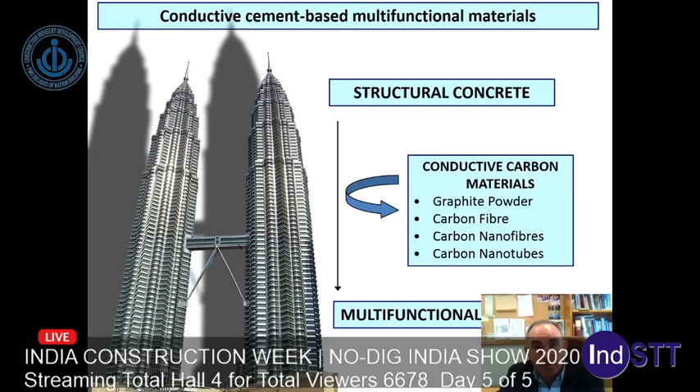It is widely known that the main function of concrete is its structural function. On the other hand, concrete is a bad conductor of electricity, it's a dielectric. However, the addition of a conductive carbonaceous material such as graphite powder, carbon fibers, carbon nanofibers, carbon nanotubes, transforms the resulting mixture into a conductive material. This gives the possibility of using this new material for other functions different from the structural one, so it can be considered a multifunctional material. Possible applications include sensing function, heating and de-icing function, and electrochemical application.

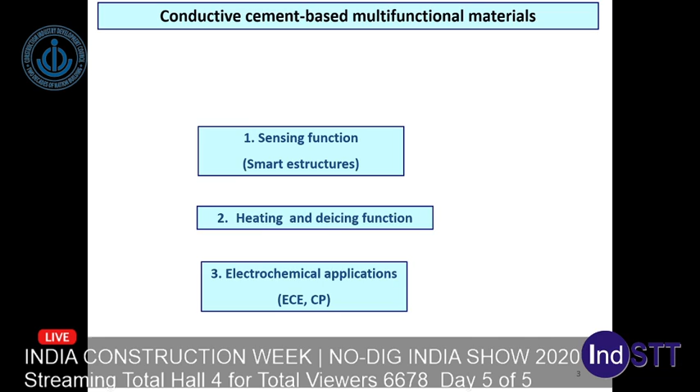Let me comment on the first function, that is the sensing function, or the ability of a structural material for detecting its own deformation when subjected to some external static or vibrating load. This means that we are in the presence of a very promising and interesting material if we want to plan an intelligent structure. Specific applications include structural vibration control, traffic monitoring, building safety, AC optimization, and structural service monitoring.

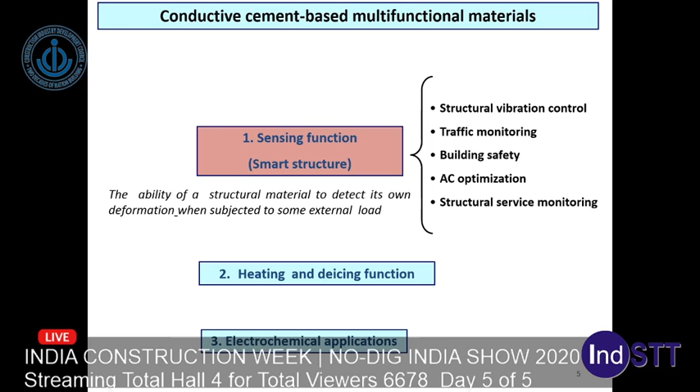Sensing function is based on the change in electrical resistance in concrete when some stress is applied to it, and it is quantified by the gauge factor, that is the ratio of fractional change in resistance divided by the fractional change in deformation. Due to the change in dimension, length of sections not being significant, the change in resistance must be due to the resistivity change in this material, which is a material intrinsic property.

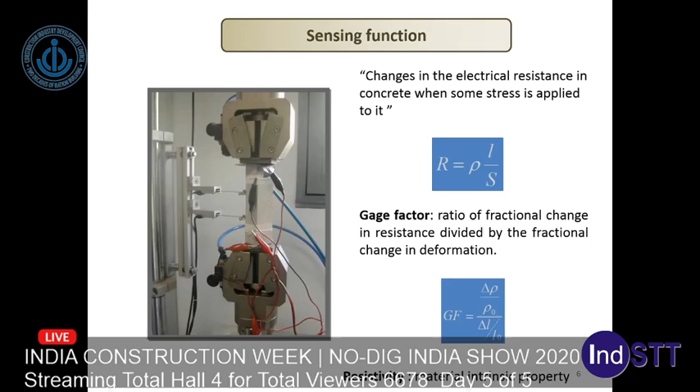Let me explain this figure. The material strain sensing capacity is defined as the response on the volumetric electrical resistivity, proportional and reversible, and due to its strain state.

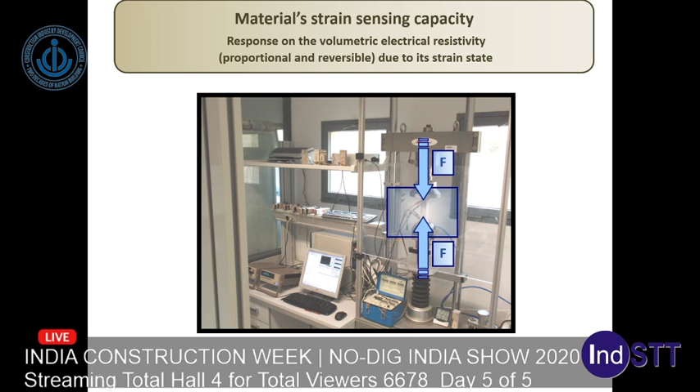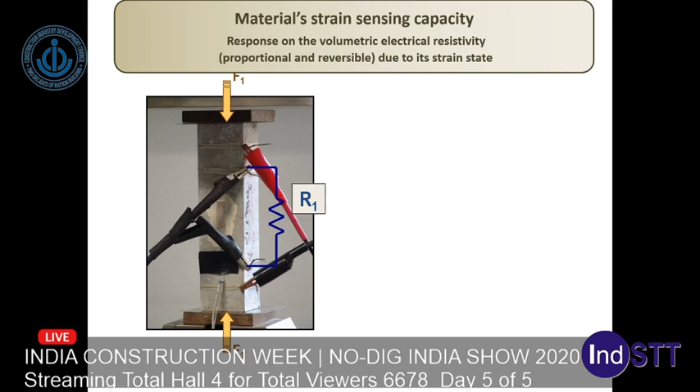If a longitudinal compressive stress is applied, the electrical resistance in that direction is reduced. The contact between fibers themselves, and between fibers and paste, becomes closer and closer, and consequently the contact resistance also changes. Vice versa, the material recovers the initial state when the stress is removed. Both effects are reversible in the material's elastic range. Therefore, the electrical resistance returns to its initial value once the load is removed.

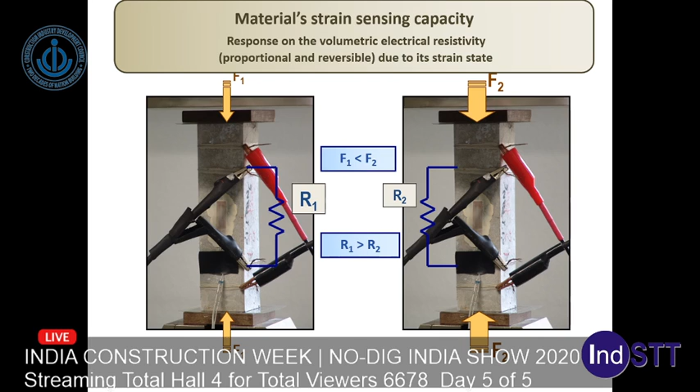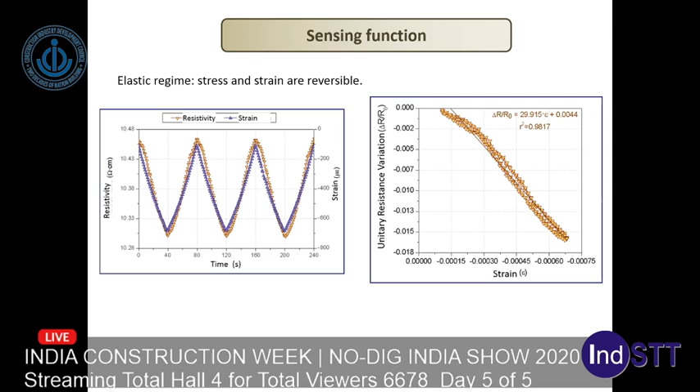It is important to calibrate each and every sensor previously to its application. To do so, the slope of the variation of resistivity versus deformation gives us the so-called gauge factor, which controls the accuracy of the measurement.

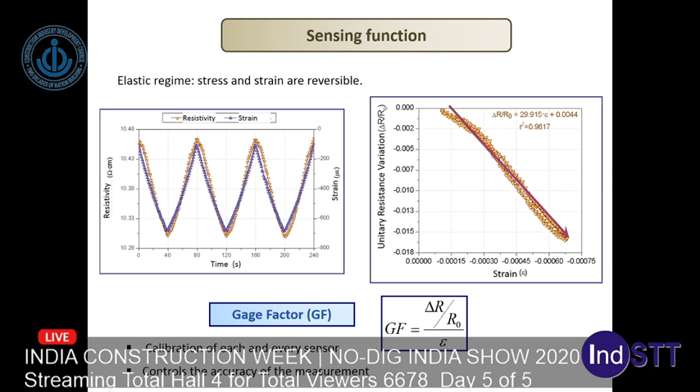In order to know the limits of the carbonaceous additions, it is important to know the value of the property called percolation threshold. Percolation threshold comes when there are enough fiber density to establish a continuous path of electrical current. For a given slenderness, increased carbon fiber content decreases the resistivity.

Once the percolation threshold is reached, it makes no sense to increase the percentage of carbon fiber because the resistivity is not any more significantly changed. On the other hand, as the fiber aspect ratio increased, percolation was achieved at lower carbon fiber content.

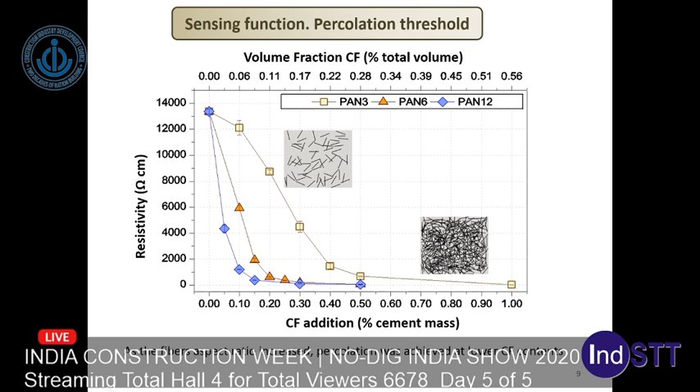This graph validates the sensing function. This figure shows the result of a test still in the elastic range, in which loads were increased and maintained for 60 seconds before the next load step, and then symmetrically decreased.

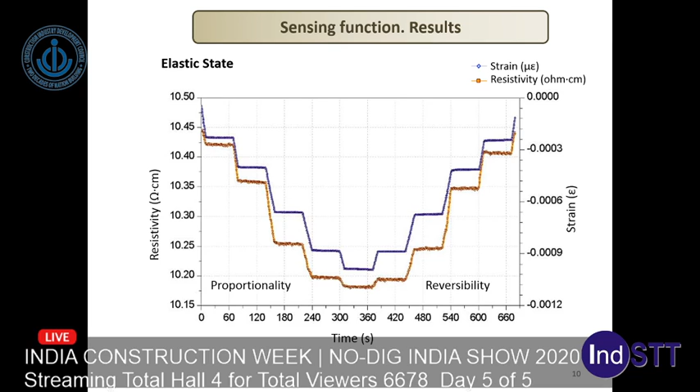Again, a very good response was observed, even in constant conditions. In blue, the strain monitored with a strain gauge, and in red, the resistivity of the specimen. Once more, proportionality between electrical and mechanical parameters, as well as reversibility, can be observed.

This is another important graph. In this slide, the response for loads surpassing the material elastic limit is presented. That is, the material is behaving in the plastic state, and the strain is no longer proportional to the stress.

The initial strain is not recoverable with the initial load. Similar behavior can be observed with electrical resistance changes, probably because of the decoupling and breaking of carbon fiber in the cement matrix. Therefore, this means that damage can be controlled while monitoring the electrical behavior of the sensor.

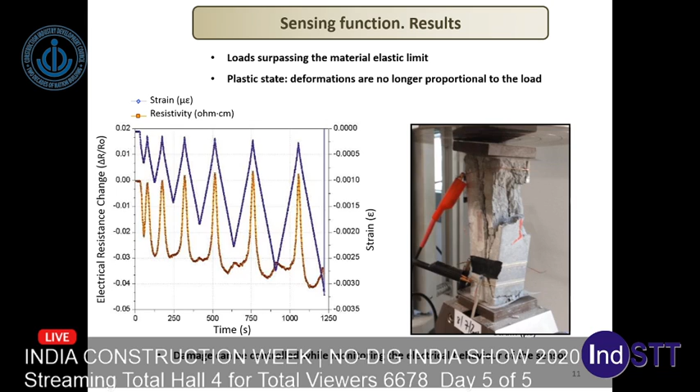Next, we decided to check the viability of attaching a small specimen of conductive cement paste on the surface of the standard concrete specimen, which is not conductive. On the left hand, we can observe that two different gauges were used, one attached to the concrete specimen and the other on the conductive specimen. That way, we could control the strain of both elements.

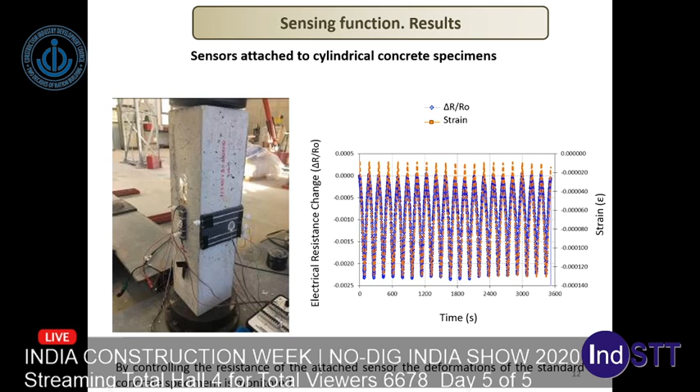On the right side, we can observe the electrical resistance change in the small conductive specimen and the strain in the concrete. So by controlling the resistance of the attached sensor, the deformation of the standard concrete specimen is monitored.

After this study with sensor attached to a small concrete specimen, we decided to attach them to a regular size reinforced concrete beam, and 28 cement composite sensors were prepared. Two different tests were made depending on the magnitude of the maximum strain and stress in the reinforced concrete. The first one remaining the beam in the elastic regime, and the second one producing cracking and final breaking of the beam.

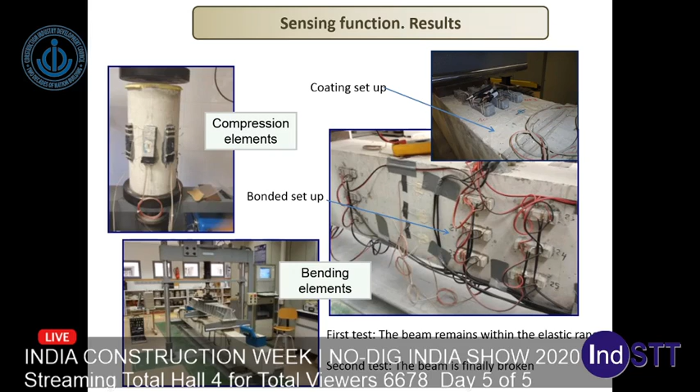This figure shows the results of one test with different load and unload stages for an on-site fabricated carbon sensor on the upper side, compressed phase of the beam. In red, sensor beam strain in micro deformation; in blue, the electrical resistance of the sensor, both versus time. Very good response was observed again.

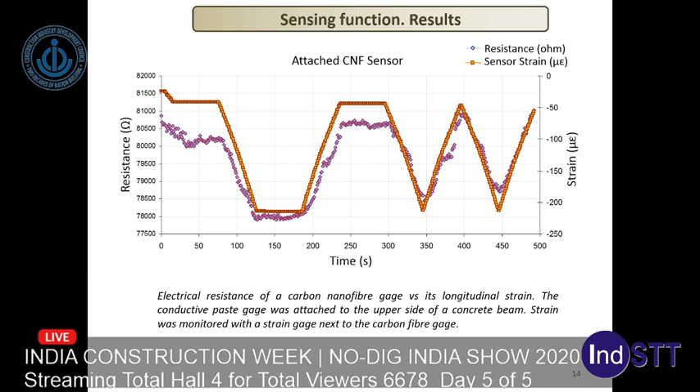Our final goal is to develop conductive cement-based materials which are capable of being strain sensors and can be applied to real structure elements for structural health monitoring.

Our future research effort is focused on a measurement system that can be computerized and a control algorithm implemented in a real structure in order to have real-time feedback of strain that can be used for structural health monitoring.

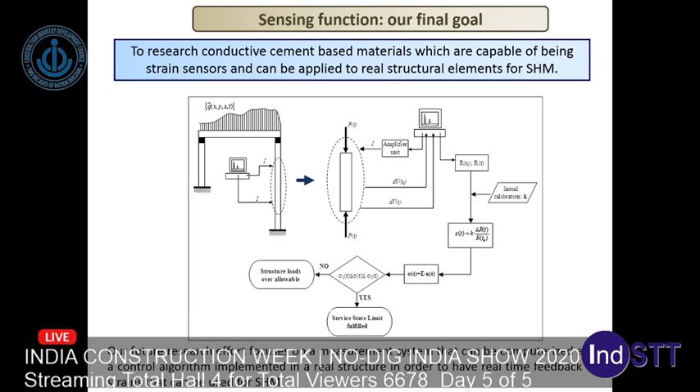The next function is the heating and de-icing function.

Many methods and techniques have been investigated for pavement anti-icing and de-icing, as snow and ice on roads causes enormous losses in human lives, infrastructure and materials.

The mechanical snow removal technique is the most used, but it is intensive, expensive and time-consuming labor. Furthermore, not all the snow is completely cleaned from the driveway by snow plows, leaving a small layer to be eliminated. Many methods currently used to remove ice from roads are based on the use of chemicals. Most of them are harmful to both reinforced concrete and steel structures, viaducts, tunnels, airport runways, and to the environment.

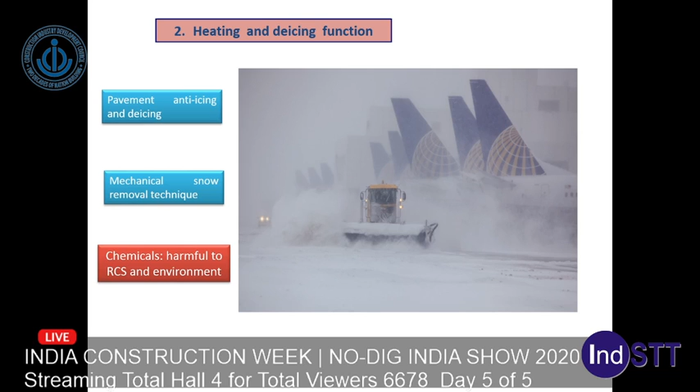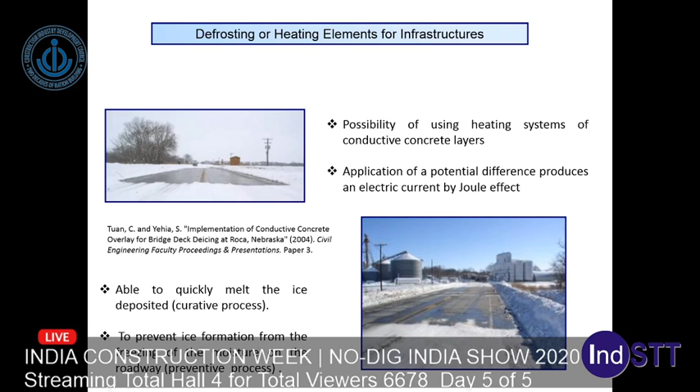Compared to these methods, there is the possibility of using a heating system of conductive concrete layers. Addition of a conductive carbon material to cement-based material allows reducing the electrical resistance of the resulting material, so that application of a potential difference produces an electrical current by Joule effect, which is able to quickly melt the ice deposited, so it can be considered a curative process, or to prevent its formation from freezing on the roadway, so it can be considered a preventive process.

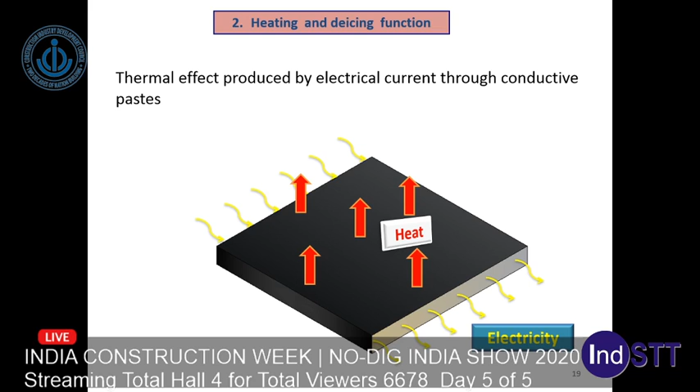As it is well known, the Joule effect is based on the thermal effect produced by electrical current through conductive pastes.

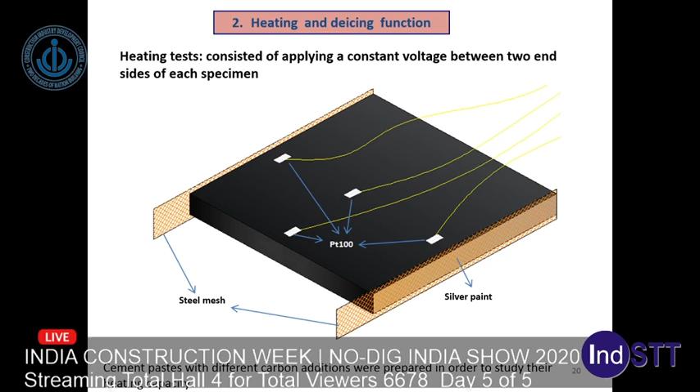The heating test consisted of applying a constant voltage between two ends of each specimen. Cement paste with different carbon additions were prepared in order to study their heating capacity. Different tests were carried out for each sample, varying the applied voltage.

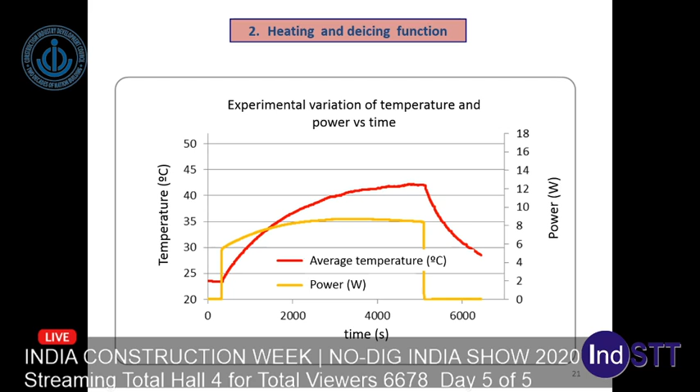We have also developed other tests reaching lower and much higher temperatures, even up to 140 Celsius degrees, depending on the composite and the power applied. In any case, we are only interested in action against icing.

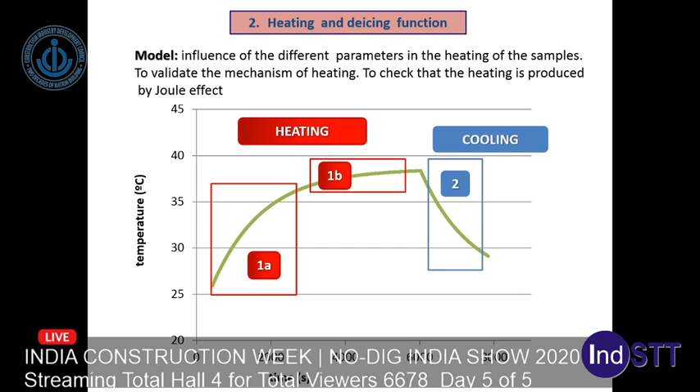In this stage, we considered validating the mechanism of heating and checking that heating is produced by Joule effect. The process will be divided into two stages for which the mathematical equations that govern them will be defined: heating and cooling.

The first stage is heating produced by the application of electrical current. The sample is heated by Joule effect in a non-steady process, and changes of thermal energy in the sample are due to the applied electrical power minus the rate of energy lost by cooling, which can be calculated with Newton's law of cooling.

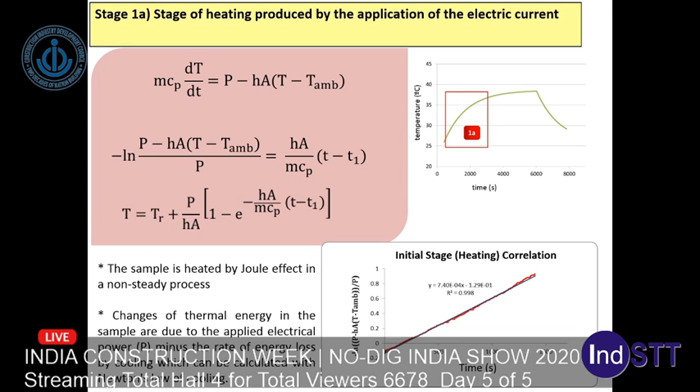In the second stage, the time elapsed is long enough to imply a steady state and a constant temperature. On the other hand, the electric power supplied in this case is equal to the energy lost.

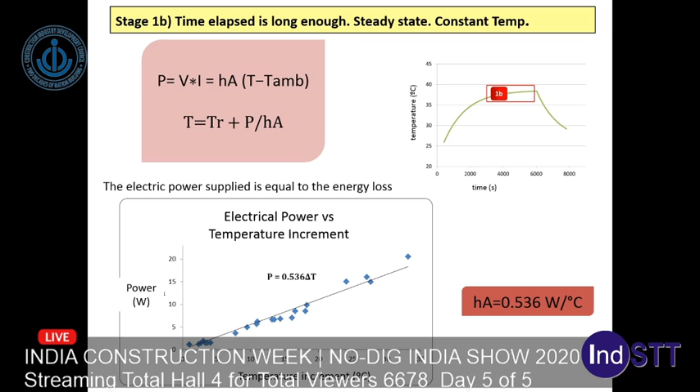Finally, stage 2 is the stage of cooling. The sample is not electrically heated. In this case, thermal energy of the sample is released to the outside.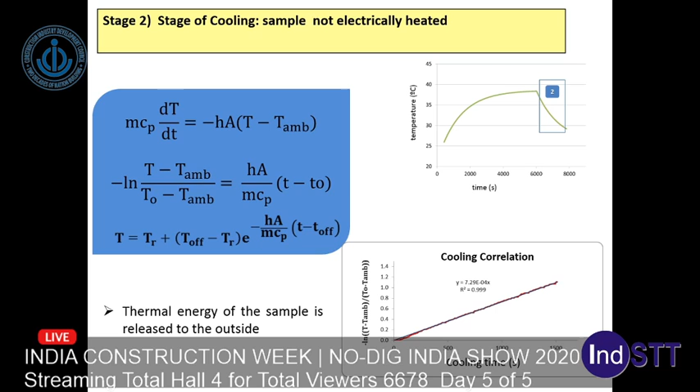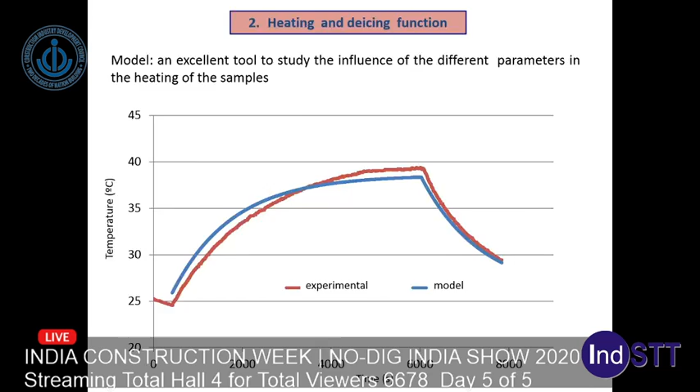In this figure, we can observe the experimental results and the calculated results. In any case, the simplified model is an excellent tool to study the influence of different parameters in the heating of the samples.

Practical application is based on the feasibility of using the cement-based material studied to control ice layers in transportation infrastructure. A thick layer of ice was added on both sides of the samples, and a great increase in the ice melting rate was observed with the application of electrical power.

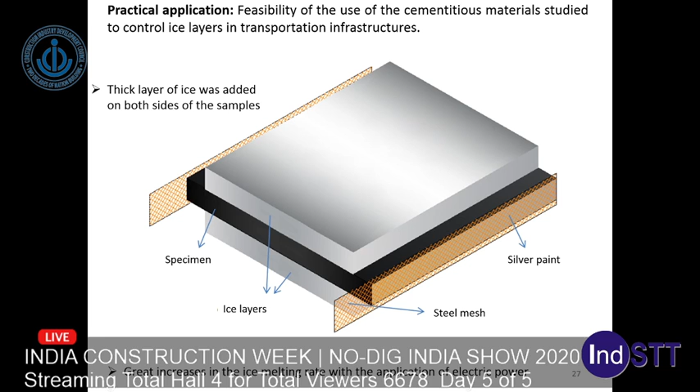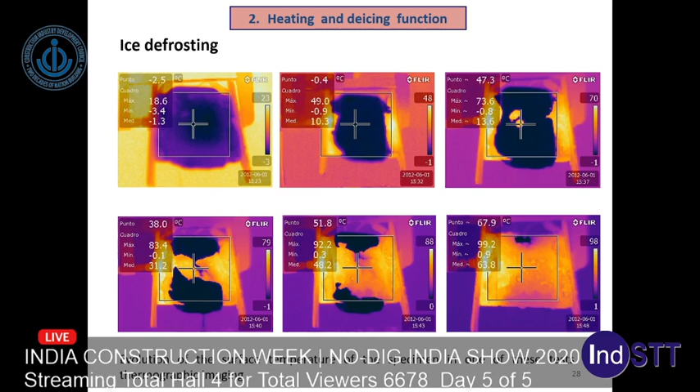In this figure, we can observe the evolution of the surface temperature of the specimen in one of these tests by thermographic imaging.

Let us imagine a real situation in which an airport runway is suffering a snowstorm, with a temperature under minus 10 degrees, and snow plows are removing the snow. The airport is suffering a real problem of flight management. Let us imagine again that the upper layer of concrete of the airport runway is a conductive layer, and then a power supply is turned on.

As a consequence, the average temperature of the surface could be increased above 0 degrees. We tried to transform this idea into experimental research.

The specimen was introduced into the freezer, with the temperature of the freezer at minus 15 degrees. Then the power supply was switched on, and as a consequence, the temperature of the surface of our specimen increased, reaching a temperature above 0 Celsius degrees.

Many hours later, we switched off the power supply, and as a consequence, the temperature of the specimen reached the same temperature as the ambient. This is, without doubt, a curative test.

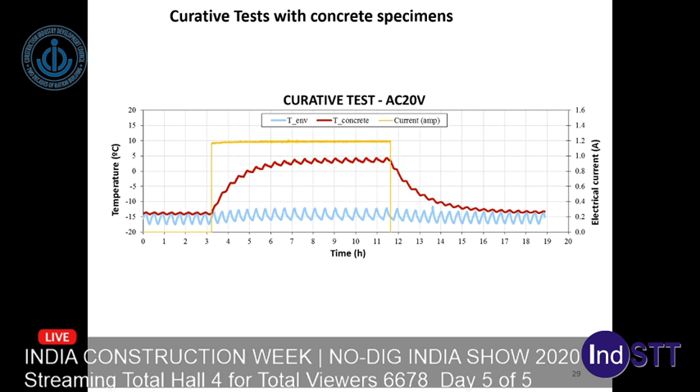Now let us imagine an airport in a real situation of fine weather, and suddenly the same snowstorm as before. Temperature is decreasing rapidly, reaching an average surface temperature of 5 Celsius degrees.

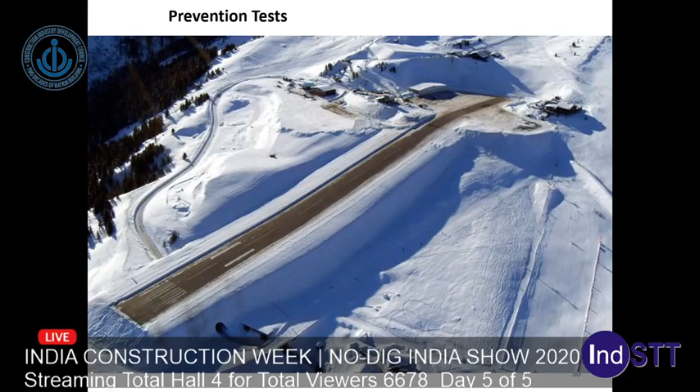In this case, the experimental test that we call the prevention test: the specimen at room temperature was introduced into the freezer. When it reached approximately 5 Celsius degrees, the power source was connected at a fixed voltage. After steady temperature was reached, the power source was turned off.

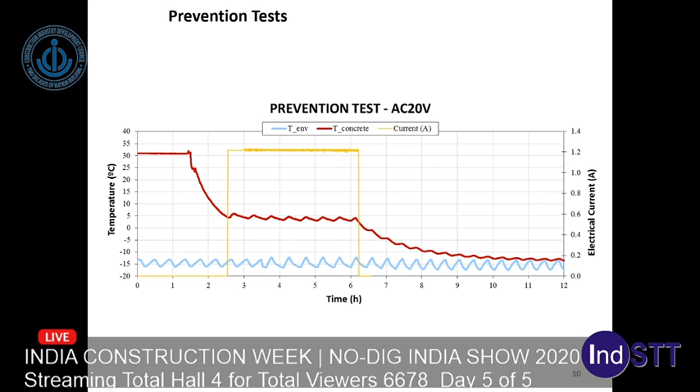The main goal of this function is the development of heating and de-icing in pavements such as airport runways. Instead of heating the whole depth of an airport runway slab, the heating is applied to a conductive layer with a formulation compatible with the slab concrete, only some centimeters deep.

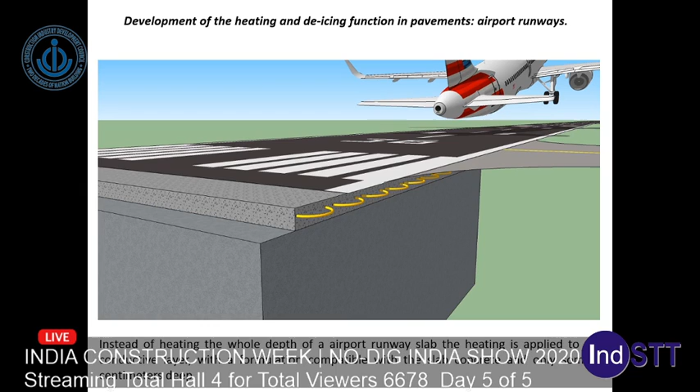Next, I am going to present the electrochemical application function. The principal objective of this function is to study the viability of applying a conductive cement paste as an anode in electrochemical techniques, such as electrochemical chloride extraction and cathodic protection.

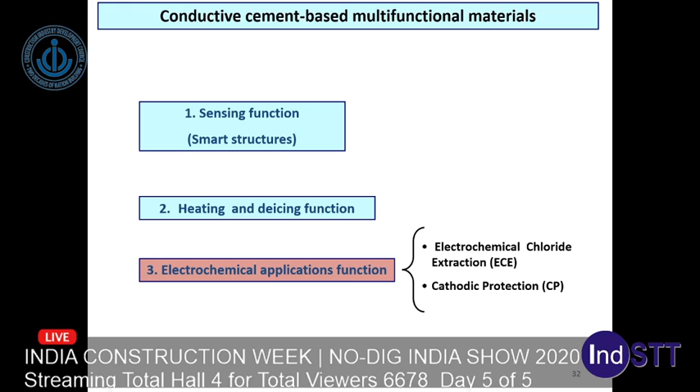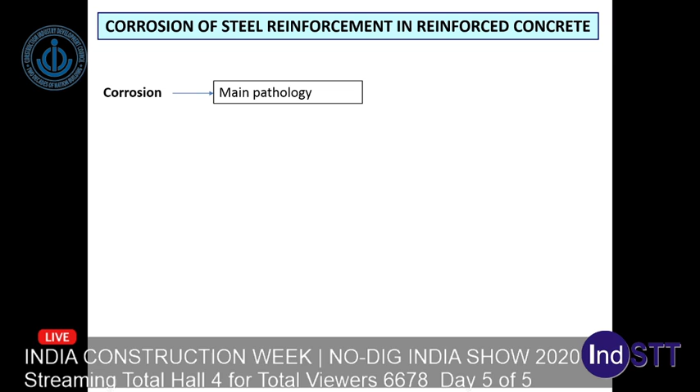The corrosion processes of steel reinforcements embedded in concrete are the main pathology affecting the durability of reinforced concrete structures. It is well known that corrosion starts as a consequence of the destruction of the passive film, which prevents the steel from corroding.

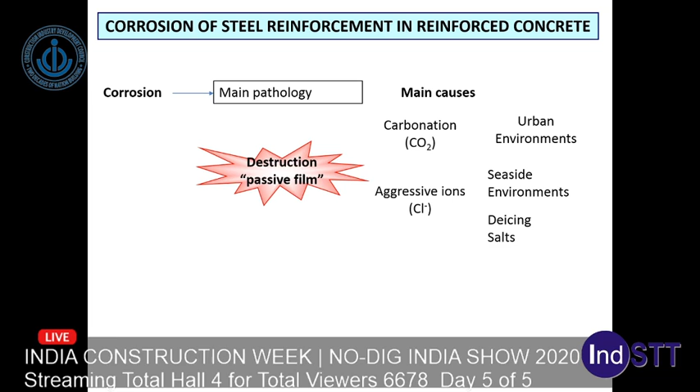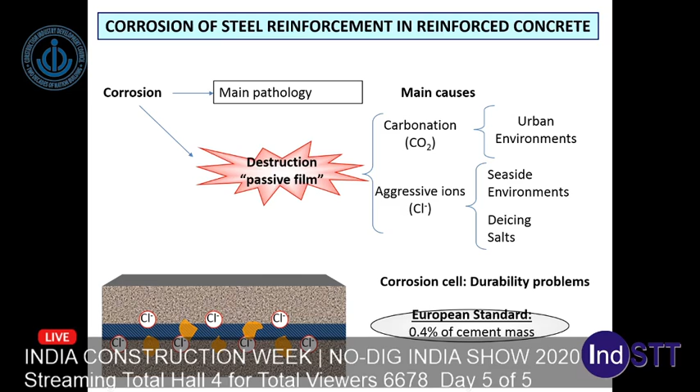The main causes are the carbonation of the concrete cover in urban environments, or the presence of certain amounts of aggressive ions such as chlorides in seaside environments, or due to the use of deicing salts. The European standard limits chloride content to 0.4% of cement mass.

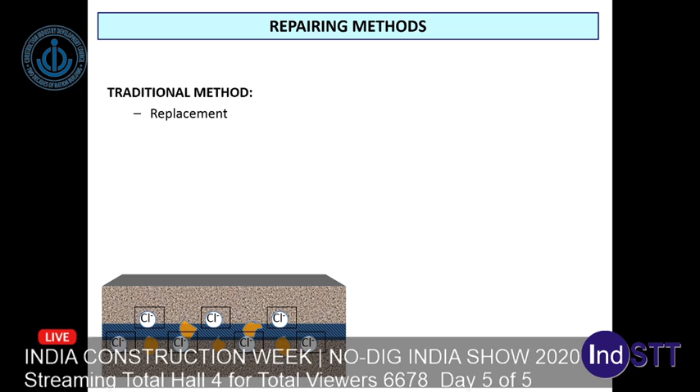When corrosion occurs, it is necessary to repair the structure if we want to use it for more time. Otherwise, there is a high risk of collapse. The traditional method for a structure contaminated by chloride is the replacement of the structural elements affected by the corrosion process. However, there exist new methods such as cathodic protection, electrochemical realkalization, or electrochemical...